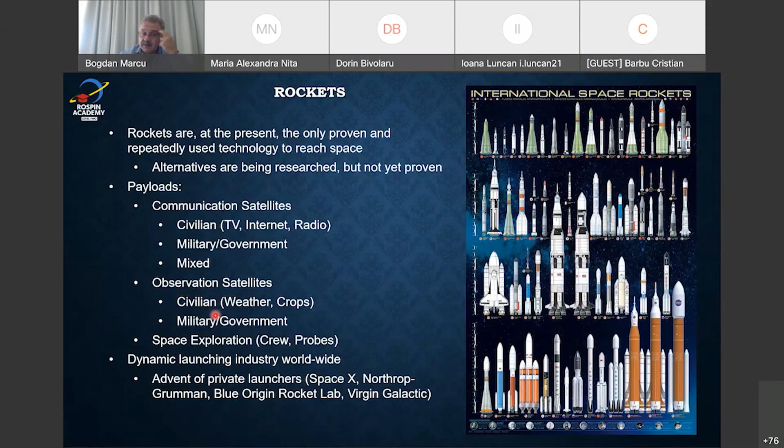There are now very advanced services that sell crop information and weather information, of course, and so forth. Until about 10, 15 years ago, this was an industry based on governmental initiatives and money. No longer, as you're very much aware, there is a new wave, and it was the first wave of private launchers like SpaceX and Orbital Sciences, now Northrop Grumman. And there is a second wave coming. We'll talk a little bit about the many startups that are brewing right now.

The launching industry is very dynamic. The number of satellites, I was lecturing about this topic until about 5 years ago, where the numbers were 1,500 satellites total launched until about 10 years ago, out of which, 5,000 total, out of which only 1,500 were active. The rest of them were just dead without batteries or extinguishing their fuel supply. But in the last 10 years, especially with the advent of this new idea of low Earth orbit constellation of large number of satellites that is being pushed by SpaceX, Starlink, the industry numbers are just exploding.

So currently the launching industry is overall the aerospace business, it's 271 billion with about 5 to 6 billion in launch services only. Just the launch services will expand to about 30 billion by 2030. So lots of rockets coming in to provide all these services. Mind you that there was a false start in the mid 1990s where there was an early anticipation of such big constellations. Iridium is the best example of such a constellation which actually went bankrupt. Technology was not there. So this time, most of the specialists are agreeing that this wave is for real and that only environmental concerns or maybe geostrategic concerns may limit the amount of satellites that we're going to see in the skies.

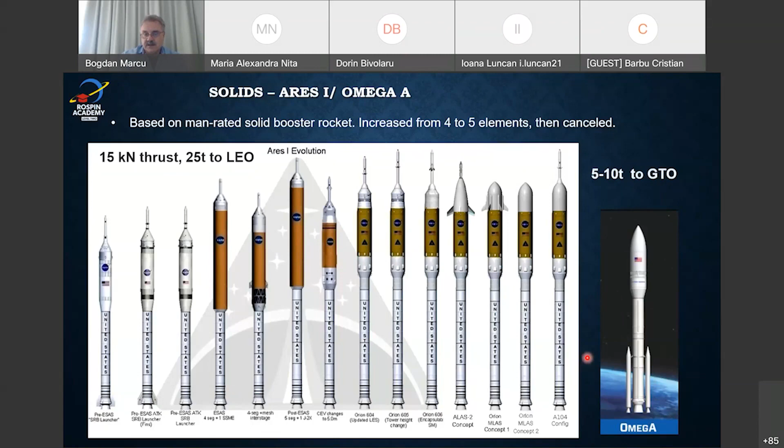On various rockets, historically and at present, of course, the tendency is to increase the payload capacity. For satellites and commercial satellites, 10 to 25 tons to low Earth orbit, which is a metric to compare, is enough. But when it comes to crewed missions, say to the moon or beyond to Mars, you need more capacity, because not only do you have to lift the crew into space, but you have to lift the upper stages that then burn one after another in order to penetrate deep space with a flight.

So the reference remains the 140 tons that was achieved in the 1960s by the Saturn V rockets, powered by 5 F1 engines, each of them with about 1.5 million pounds of thrust. I'll list in a minute the thrust in newtons and SI units. But you can see here that 140 tons is hard to match today.

Even the Space Launch System, which will soon launch in May, is only at 95 tons in this Block 1 configuration, anticipated to increase to about 130 tons in a Block 2 cargo. And these plans are changing as we speak, because various developments are being considered by NASA. The Starship, which will hopefully fly soon from SpaceX, is now going beyond that number with a projected 150 tons when this rocket reaches maturity.

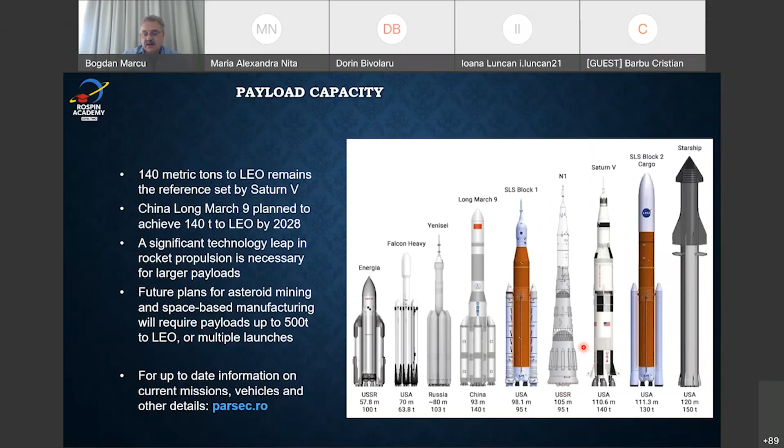And also what the Russians, for instance, didn't have for the Rocket N1, which had, I believe, 30 engines or so, attempting to use multiple engines in a way to generate enough thrust to go to the moon with all these upper stages. The controls available at that era generated instabilities in the operation of so many engines that this very expensive Russian or Soviet rocket was launched twice, and twice it failed in an exceptional way with spectacular explosions.

Besides this liquid propellant rocket engine, the chemical one, there are other principles which were developed and proven, among which is the nuclear thermal. We'll talk about temperatures developed here at the core, which in the chemical engines is obtained by combustion. For the nuclear thermal, the fluid is just flown through core of nuclear fission reactor, so to speak, where the source of the heat is just the radiation itself. Was demonstrated. It's even more performant than the chemical rocket, but there is the perceived public risk of flying nuclear material in space, and for that reason is not yet employed. It's in the planning, however.

And of course, there is the electric propulsion, small thrusters that have a very low thrust but extremely efficient operation, which are used for satellite navigation, station keeping, or even achieving deep space flight. That is, probes that go to Mars, Jupiter, and so forth.

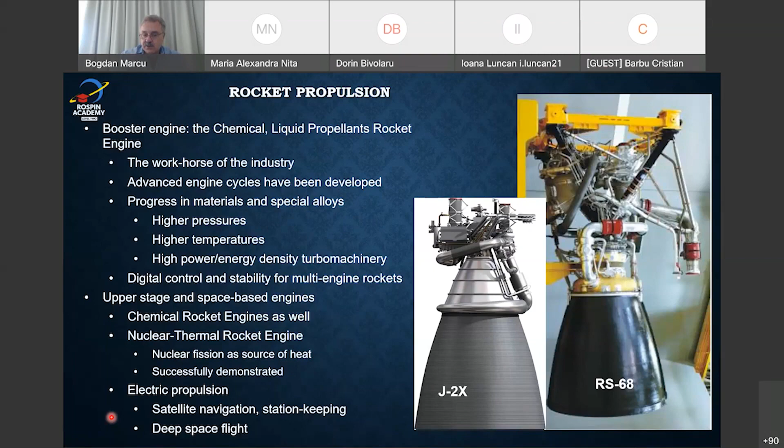So the principle of rocket propulsion is simple. Some of you may study it in school, and for some of you it's new, so I will just assume that for everyone a good intro is welcome. The principle is Newton's third law. Action provokes reaction. We have a recipient of high pressure gas and temperature that we engineered in a way that it expels a mass flow of hot propellant towards my right. And of course, that continuous mass flow of fluid generates reaction of the entire recipient and its extended nozzle towards the left, and we obtain thrust.

There are, of course, various details here. When we look at the thrust equation, we see that the major term here is the product between the amount of mass flow of propellant that we're expelling and the velocity of that propellant. So that's a major component of the thrust. And then there is a play of pressure here at the exit of the rocket nozzle, where depending on which is the gas pressure, PE, versus the atmospheric pressure or ambient, PA, can generate a plus of thrust or a minus of thrust. So the game that's being played here is different for boosters that start on the ground and for upper stages that operate only in space.

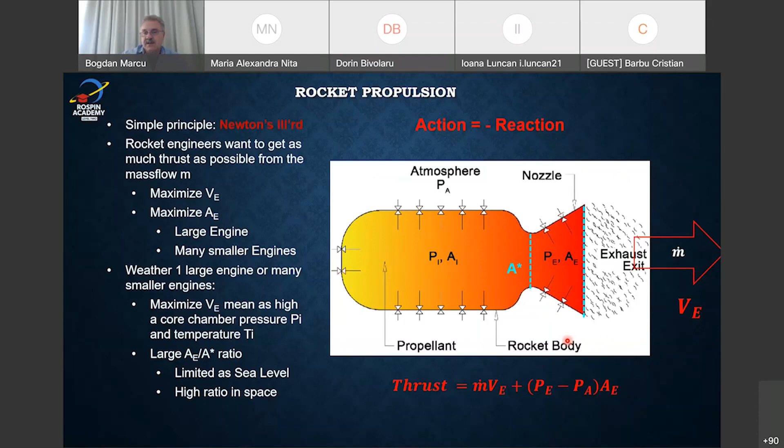While the principle is simple, the idea is that we can start with a nice chamber with enough pressure and temperature in it, but as soon as we expel the gas, this empties, and we're left with no thrust. So for practical purposes, we need to have two tanks, one of fuel, one of oxidizer, and through a mixer and injector, feed them continuously into the rocket engine to maintain this operation and thrust, typically for 150 to 200 seconds during the booster part of the launch, and for the upper stages, a longer thrust of maybe 300 to 400 seconds.

So obviously we put these two propellants into tanks attached to the rocket, and then continuously feed them into the rocket engine. Then more interesting problems appear from the engineering point of view. We want this chamber pressurized as high as possible. The higher the pressure, the more expansion we can get towards the ambient and get more thrust. The first idea is to put these two propellants into tanks that are pressurized really high, and then just feed them through some regulation valves into the rocket and maintain thrust. The problem with this idea is that in order to pressurize these tanks at such a high pressure that we need for the rocket, we need to build really strong walls for these tanks, and obviously then you end up with a very heavy rocket.

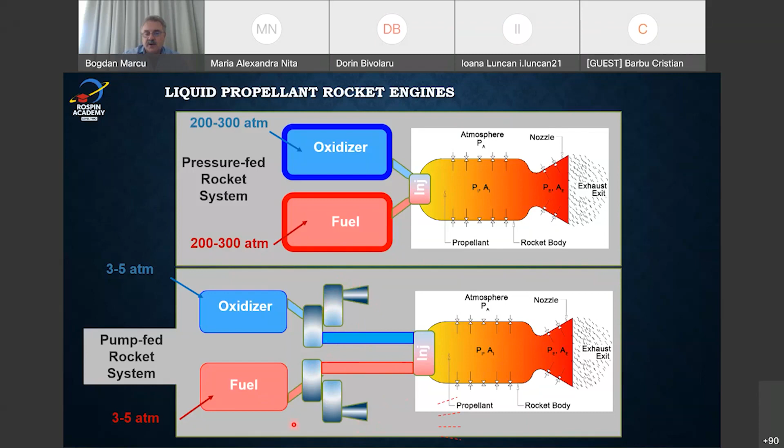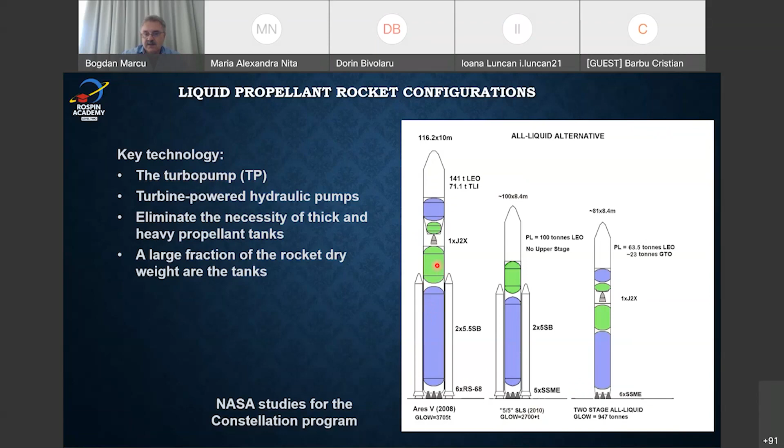The amount of fuel, to go back to this thickness of the tanks, this is a study also during the Constellation program. I borrowed this chart to show you that while the engines are this small compared to the structure of the rocket, most of the rocket is just tanks. These tanks of oxidizer and fuel, this is for the lower first stage, this is for the second stage, are the most part of the body of the rocket. So if you make them thick, then you end up with a very heavy rocket. You need these turbopumps to feed the rocket engine.

You'll see that the powering of these turbopumps is done by turbines. Many times I get the question, why do you need turbines for rockets? We need those turbines in order to power these pumps that feed the rocket engine. And in the very first turbopumps, there is a turbine on one end and the pump on the other end that are installed into the rocket engines. They were developed first in the USA and in Soviet Russia at the time, in the 1930s. Here in the States was Robert Goddard, and I'll show you some pictures.

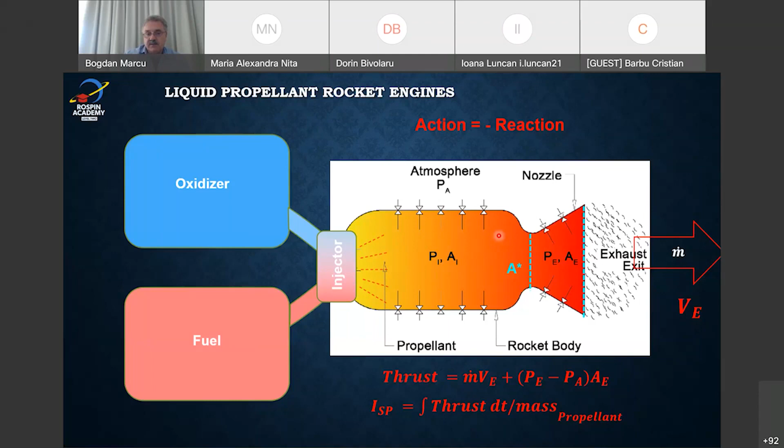And for a chemical rocket engine of very good performance, this ISP has a number of about 400 to 420. That's for hydrogen and LOX propellants. For LOX and RP, this ISP is in the mid to low 300s, and for other combinations is lower. So you would see that this very first engine had a very low ISP for the time. It's a very first turbopump powered rocket, 145 to 150 seconds ISP with this propellant.

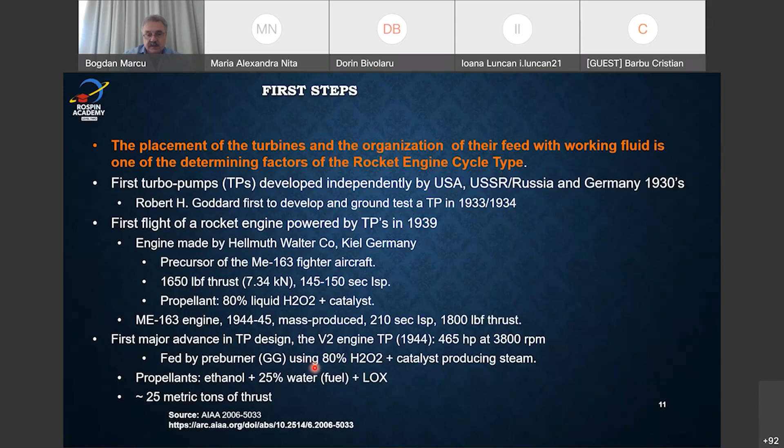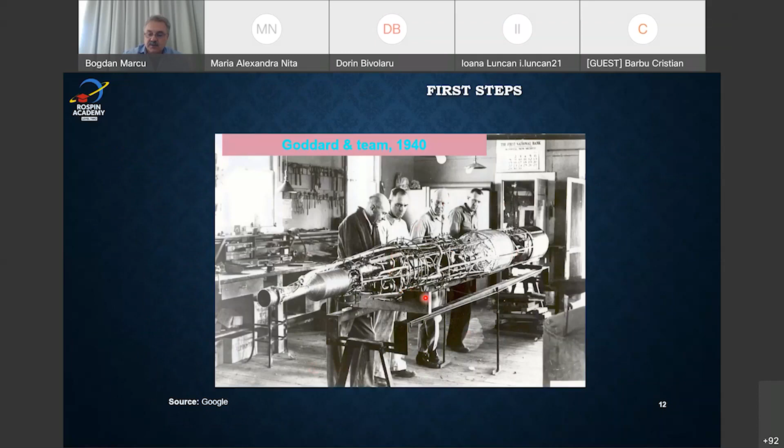The Messerschmitt 163 engine then followed, I'm going to show in a picture in a second. Then the V2 engines developed by von Braun, then developed the pace of the turbopump in the modern engines that we're seeing today. This is Robert Goddard, one of his early rockets, somewhere hidden in a small turbopump. Interesting, here is the Messerschmitt 163 engine. It was powering this very small aircraft.

Germans were desperate in 1944 and 45 to have an airplane that would take off extremely fast and meet the incoming bombers from England and United States coming to massively bomb Germany. And this was the technology response that Germany did. It was powered by a rocket engine that you see here. Somewhere here is the turbopump assembly, a very long extension in the rocket engine. You could see very little expansion. These were not very performant engines.

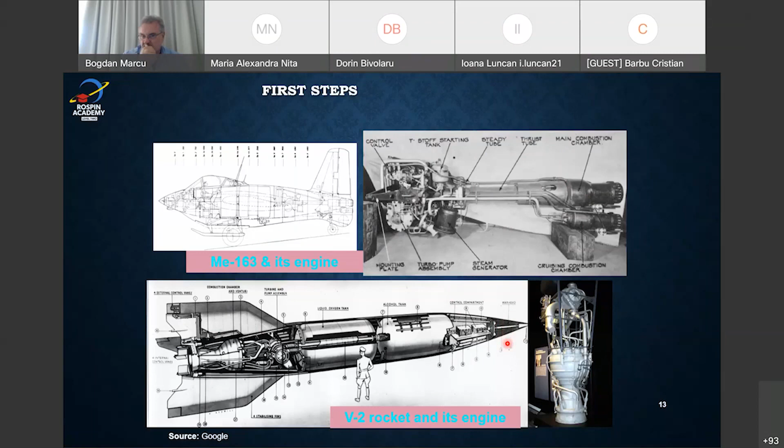The other lesson that we learned is that when you suck the propellant from the tanks at relatively low pressure, the pump experiences cavitation. That is, the fluid develops vapor, and when the vapor collapses in the metal of the blades, it generates destruction, which in a minute or two can destroy your entire engine. And they developed this technology called the inducer, this screw type of part of the pump that sucks the low pressure fuel, increases its pressure a little bit, and that routes it to the main part of the pump.

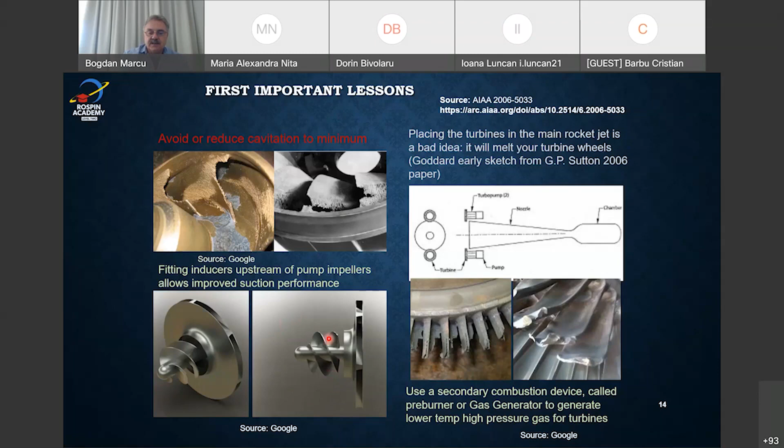So, as I mentioned to you, the placement of these turbines and how you organize the cycle of the rocket engine basically determine the nature of the rocket engine. What Werner von Braun did is to realize that you can't put the turbines here in the nozzle. It's too hot. So then we would organize a small combustion chamber where we would mix propellants in a different mixture ratio. That is, we'll make the gas relatively colder compared to the rocket.

We will put this gas through the turbine. That turbine then will power the two pumps. In this particular case, they are on the same shaft. One turbine powers both pumps, but whatever fluid we're using for the turbine will be then thrown away. While this is a good idea, this fluid is colder, the turbine operates properly. This mass of fluid that we're throwing away then does not participate in the rocket thrust equation, so we're losing it. This cycle is called the GG cycle, from the gas generator cycle.

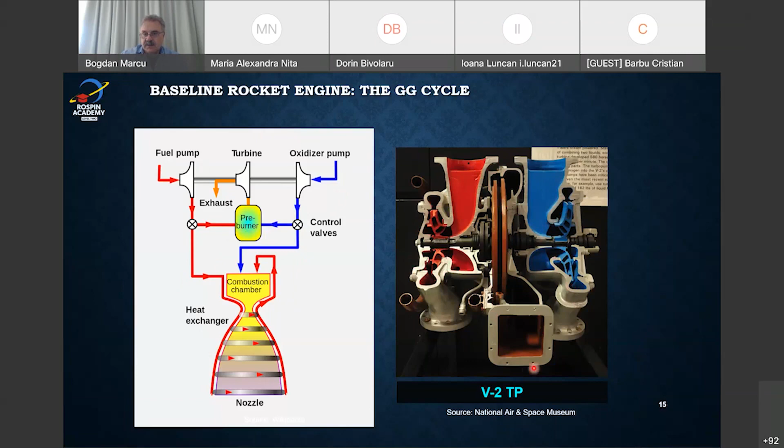It's one of the first ones, and you could see here the V2 turbopump, where the turbine is here in the middle. This is the inlet, and somewhere in the back is the discharge, and this is the fuel pump, and then this is the oxidizer pump that are being powered together. This is the V2 rocket.

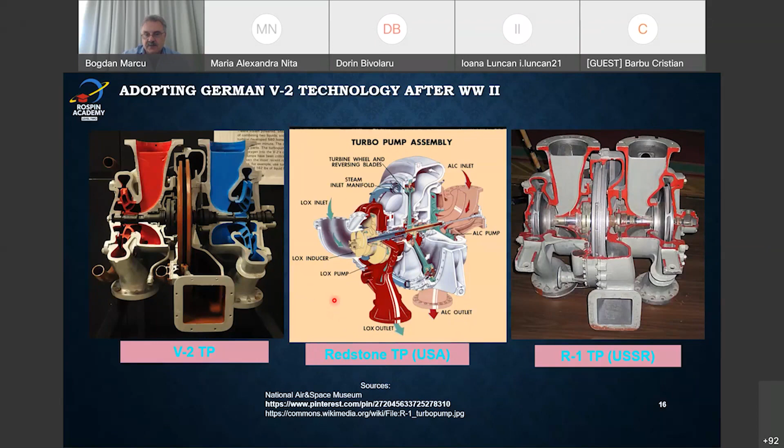Immediately after the war, of course, the winning powers, both Russians and Anglo-Americans, borrowed not only the technology, but the scientists themselves. Werner von Braun and about 100 people in the States, many others in Russia. And you could see that the immediate technologies developed after the war in both Russia, USSR, and in the United States under the name of Redstone are essentially replicas of the original V2 engines. And I had the opportunity to take a look at the Redstone turbopumps right in the backyard of Rocketdyne, where I worked in the late 90s and early 2000s.

So the original cycle that was employed by von Braun and later on even by the F1 engine that powered the Apollo booster had then various other developments. One of them is, for instance, the GG cycle, where the fluid obtained in the gas generator is split into two, and you have two turbines, each of them powering the attached pump.

Why would that be? Well, here we're having a cycle that is using kerosene and liquid oxygen. These two fluids have very similar densities. The pumps are centrifugal pumps that operate by swirling the flow of this particular density centrifugally and obtaining that large pressure that you need for the rocket combustion chamber.

When we're moving then into a cycle where we have on one end hydrogen and on the other end an oxidizer, such as LOX, the density of the hydrogen is about 15 to 16 times lower than that of the oxidizer. So in order to obtain similar pressures, the hydrogen pump has to rotate much faster. So you cannot have the same turbine powering the same shaft because the fuel pump wants to spin faster. So you absolutely have to split the configuration of the engine in two turbo pumps to operate them separately at the necessary speeds. You could do this in parallel, like here.

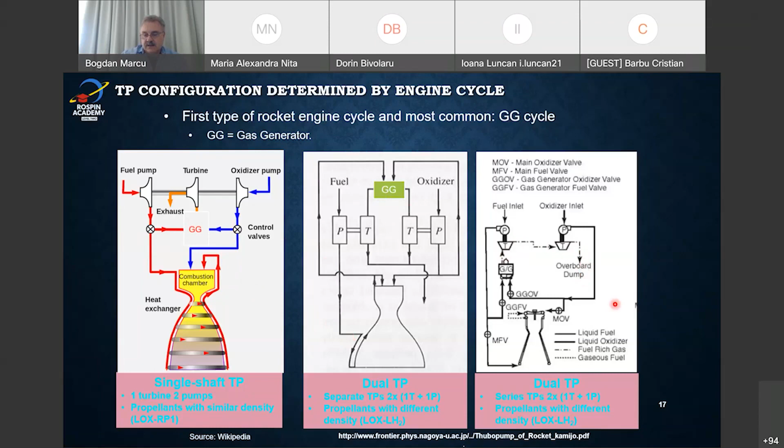This example is the RS-68 engine of the Delta IV rockets. Or you could organize them into a series where you generate the gas, you power first the fuel turbo pump, much faster speed. Whatever energy is left of the fluid after the fuel turbine, you route into the oxidizer turbine that needs lower speed, so relatively lower power, and then you dump it overboard. Okay. In all these cycles, the common element is that whatever you're using in the GG, you're dumping it overboard, and you're losing some of the mass flow that you need for the rocket thrust.

Here's an example of the image of the F1 engine. This is the Apollo era Saturn V engine.

Excuse me. Hello? Yes, sir. Yes, I'm sorry. I'm in a presentation here. We have to talk later. Thank you.

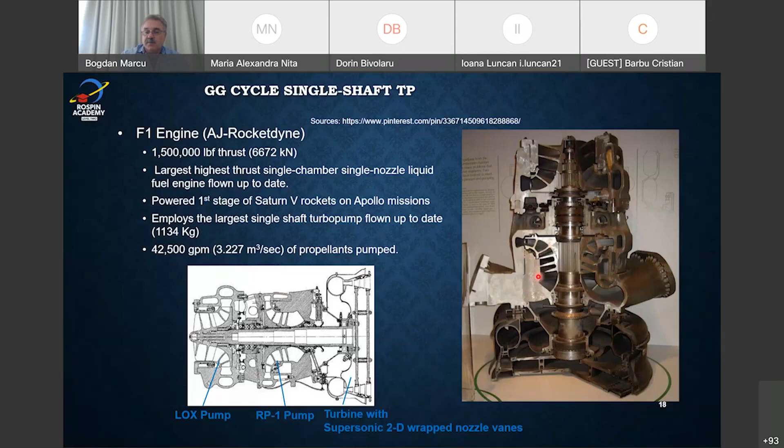Sorry. We're talking about Saturn. This turbo pump is the largest built. Not even the RD-180 has such a large pump. We don't know much details about the engines of the Long March 9 that is being developed now in China. But this is a pump that weighs 1.1 tons. And it's the typical example of a single shaft. You could see it, the turbine at one end. And here is the fuel pump and the oxidizer pump on the opposite end.

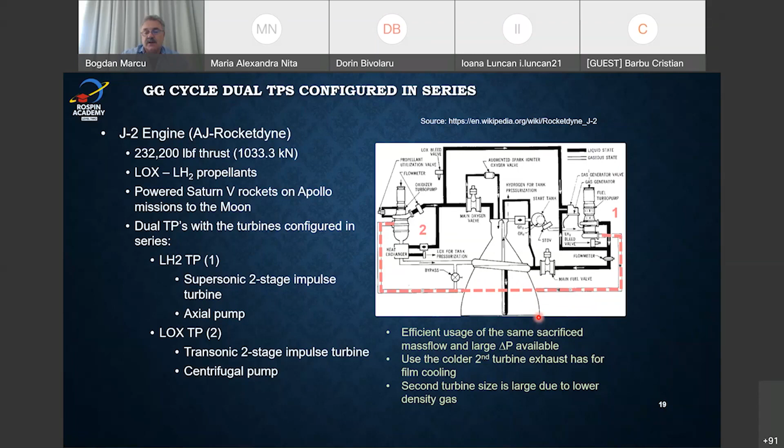And then what's left of this fluid is being injected through this little ring into the extension of the nozzle. J2X is an upper stage nozzle that has a very large extension cone, and it's very hard to cool that cone. So one of these technologies is to take the fluid of the turbines and inject it along the walls. It's a hot fluid, but not as hot as the main fluid of the rocket engine, and you're cooling the rest of the nozzle.

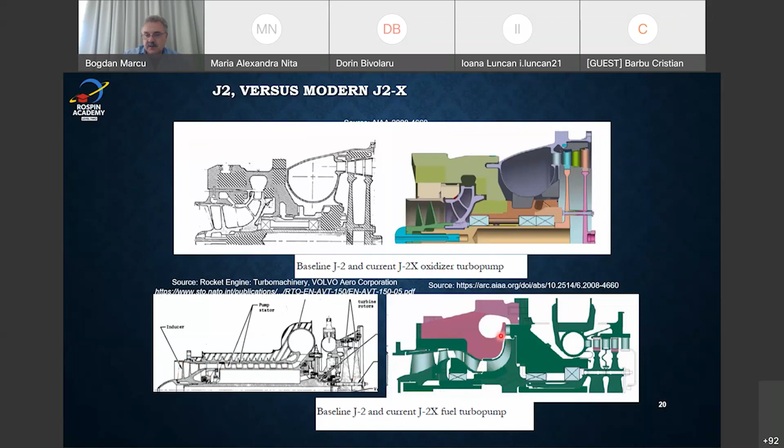This is the old version, and this is heavily censored for publications. The cross section was used for the J2X during the Constellation program. The same here for the fuel pump. The original fuel pump, mind you, developed by the Germans that were still working for NASA at the time, had an axial pump. This inducer that I mentioned to you, plus something that looks like a compressor today, whereas for the latest development, the Rocketdyne engineers have used a centrifugal pump, where the inducer would be coupled with a centrifugal pump and another two-stage turbine.

The late 70s, also having von Braun still working at NASA, brought another more advanced cycle, which was called the staged combustion cycle. The Germans and the NASA scientists were unhappy with the fact that some amount of fuel had to be dumped overboard via the GG cycle and not used in the production of the rocket thrust.

So from this point of view, they introduced the staged combustion cycle, where they would take the fluid from the pump, route it through cooling the entire engine, and then split it into two GG types. We call them pre-burners, where a little bit of oxygen would be introduced, such that they would produce gas with a certain pressure and temperature, but not too hot. And then the resulting fluid would be routed through two turbines, again, fuel, hydrogen, and oxygen, liquid oxygen. And then whatever hot gas remains from the turbine would be just injected into the main rocket and expanded. Here is what we call the power head.

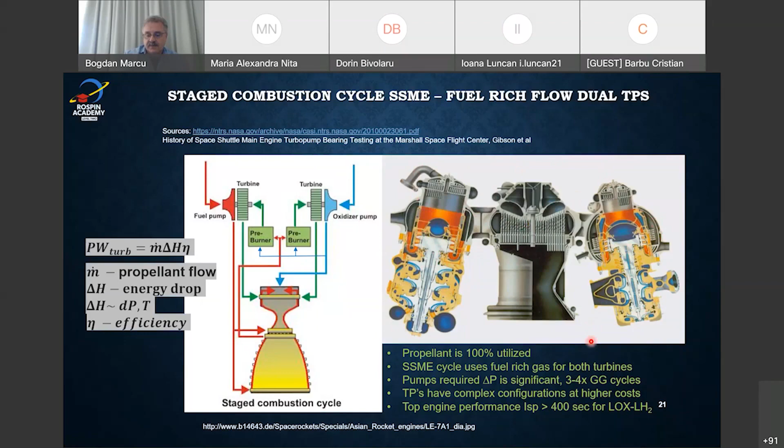The two pre-burners, one here and one here, dump the fluid into the two turbines, then it's being routed through these collectors into the main engine. And each of these turbines is powering the very high pressure pumps. These are more details of these turbo pumps. This new cycle, besides having the advantage of generating much larger pressures for the rocket engine, and therefore a much more performant engine, also had the full utilization of the fluids, so no mass flow was being dumped overboard.

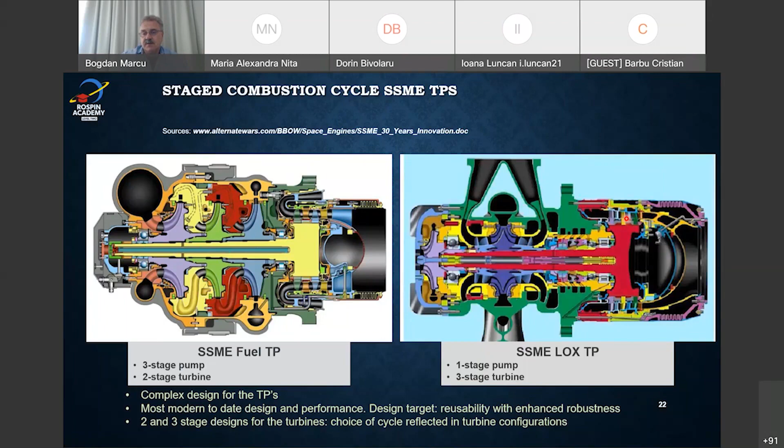The unfortunate part here, the compromise, was the fact that the engineers did not want to flow through these turbines anything other than hydrogen and steam. When you combust in the pre-burner hydrogen and a little bit of oxygen, you get hot steam combined with rich hydrogen. For that reason, these turbines are relatively small and have more than two stages, and they are operating relatively hot in order to get the necessary power to rotate these massive pumps. The same here for the oxidizer turbo pump. You need 3 stages of turbines to route that relatively small amount of fluid and power this massive oxidizer pump.

The Russians, in parallel to this development, had developed another critical technology. They developed materials that were compatible with high pressure oxygen. In the rocket, you have more mass flow of oxygen than mass flow of fuel, be it hydrogen or kerosene. So if you are able to develop a large turbine that can flow high pressure and high temperature oxygen without exploding, if you're rubbing metal against metal or you have another incident like that, like a part breaking a little bit from somewhere in the engine, that happens sometimes, and impacting on the blades, surrounded by high pressure, high temperature oxygen, this entire thing goes kaboom.

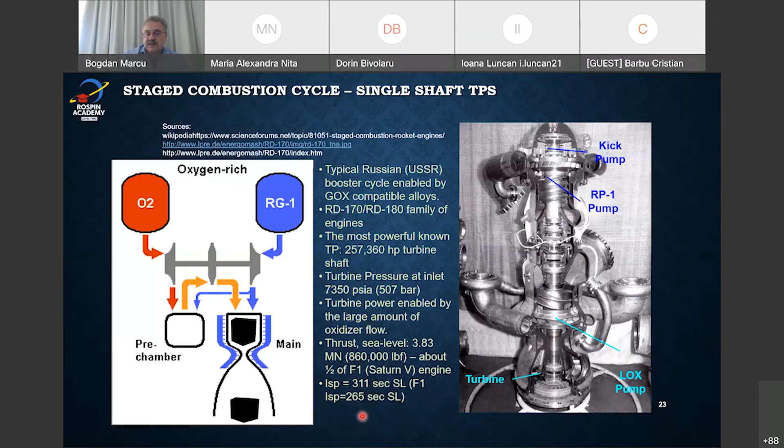The Russians developed this set of alloys, and they developed the oxygen-rich turbo pumps. That is, in the preburner, instead of having a majority hydrogen plus a little oxygen, they would flow the entire mass of oxygen with a little bit of kerosene, so producing a high pressure, high temperature gaseous oxygen with a little bit of steam in it and pushing it through the turbine. And of course, kerosene and oxygen have very similar densities, and they would do this through a single turbo shaft. Here you go. This is a cross section of the RD-180 or RD-170 family of engines. These are extremely performant engines. While they produce about half of the thrust of an F1 engine, they have a better ISP of 311 seconds compared to the 265 of the F1 engine.

Naturally, the fact that that material that was initially developed by the Russians existed has generated finally the most advanced and currently used engine, which is called the full flow engine. Instead of having all hydrogen split into or all oxygen going for the full turbine, this engine takes the fuel, let's say hydrogen, under high pressure. Then first it's cooling off the skirt and the combustion chamber of the main rocket engine, and then goes to a preburner or a GG, which is then fed with a little bit of oxygen. So it produces a flow of majority hydrogen plus a little bit of steam through a single stage turbine.

The oxidizer, the LOX, it goes through a pump, high pressure, goes to another preburner, which is fed with just a little bit of hydrogen, and it produces a mixture of high pressure, high temperature oxygen with a little bit of steam, pass through another single stage turbine and powers the oxidizer pump. This way, you have relatively cold flows with a large mass that powers two turbines, and then everything gets collected into the rocket engine and produces thrust. This is the more elaborate version of the RD-180 engine.

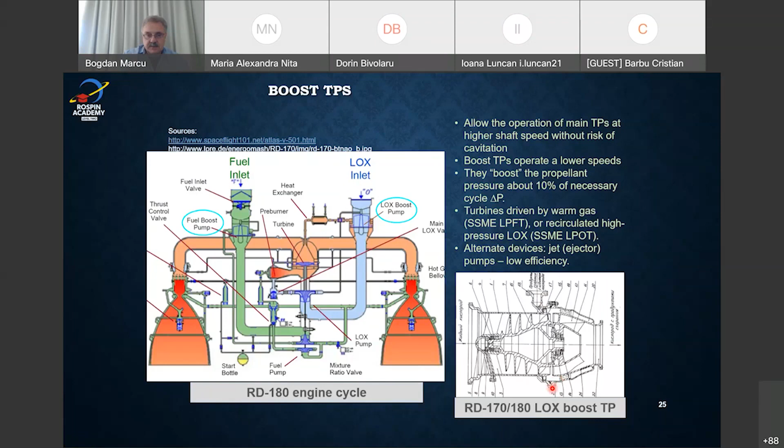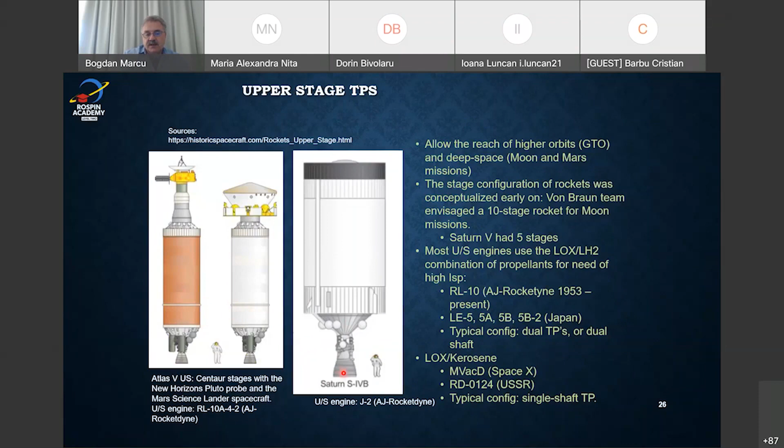the main combustion chamber. This is also another type of cycle where there is no combustion for the turbo pump especially. Instead, the liquid hydrogen that is being discharged from the pumps is being routed as usual to cool the skirt and the main chamber. And then warm, as it is not hot, but warm, it has enough energy to go through the turbine and being then rerouted into the main turbopump, so into the main chamber of the rocket. So therefore, the energy used for the turbine is essentially the heat that's being picked up by cooling the engine. These are called expander cycles.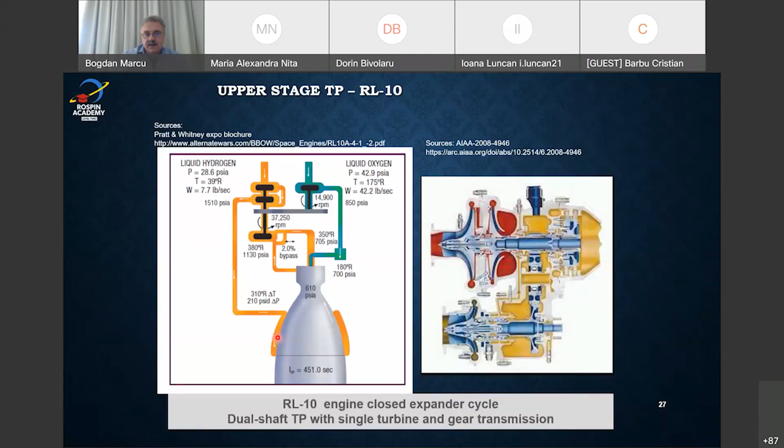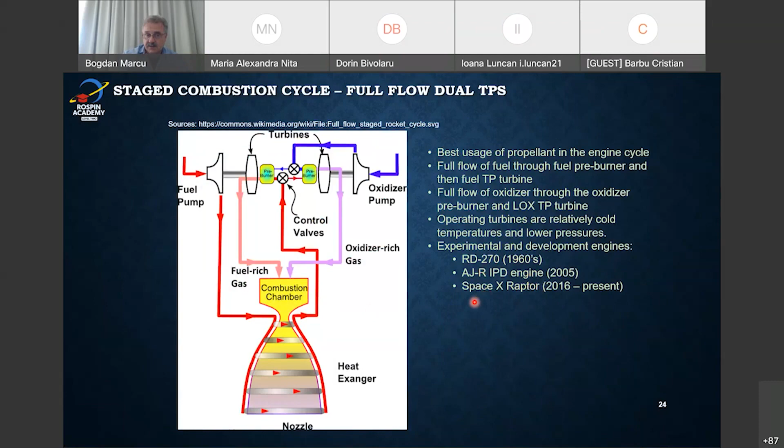So we're getting closer now to a summary. In the future, the way I see it, the stage combustion cycle, this particular one, it's probably the future. Everybody's developing this. These are the SpaceX Raptors. It was demonstrated by Aerojet Rocketdyne in 2005, and there are other companies that are using them. The new smaller startups like ABL or Relativity Space, even the Rocket Lab, they are going back to GG cycles because they are the cheaper, the most proven, and these companies are targeting a relatively small, narrow niche of 500 to 1,000 kilograms of satellites launches, not big ones.

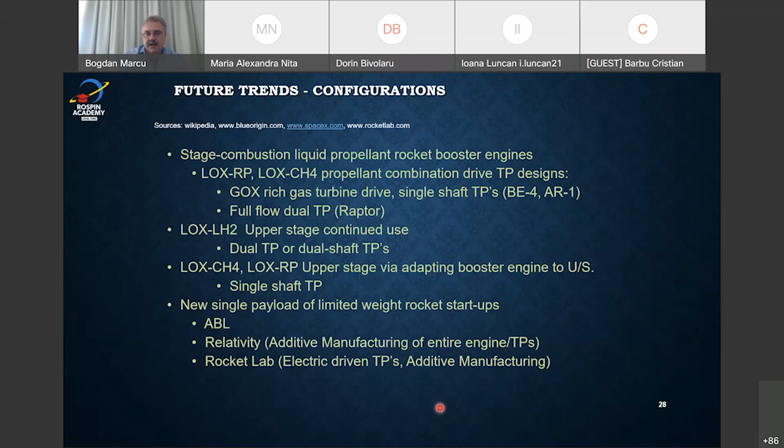And then we will see how the market will select through all these companies. It is clear to me that the financial market of launch industry cannot sustain everybody that's trying now to develop rocket engines. We will see how this will pan out. Technology-wise, NASA is not experimenting with new cycles, but new forms of fabrication. And I'm showing here some examples. NASA has generated a full engine printed, 3D geometry printed.

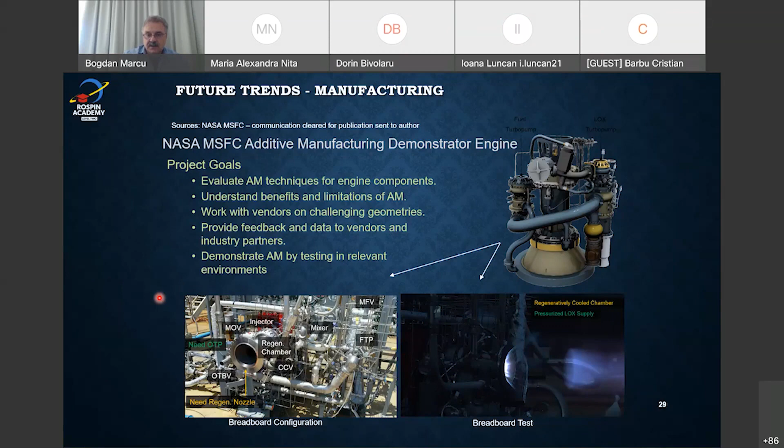They do that by trial and error, working with very many suppliers that print for them. They're not just printing them themselves. And there are a lot of feedbacks and shortcomings to these technologies, but they managed to test 2 turbopumps and 1 engine. And you see here examples of parts being 3D printed and then surface finished by one technology or another.

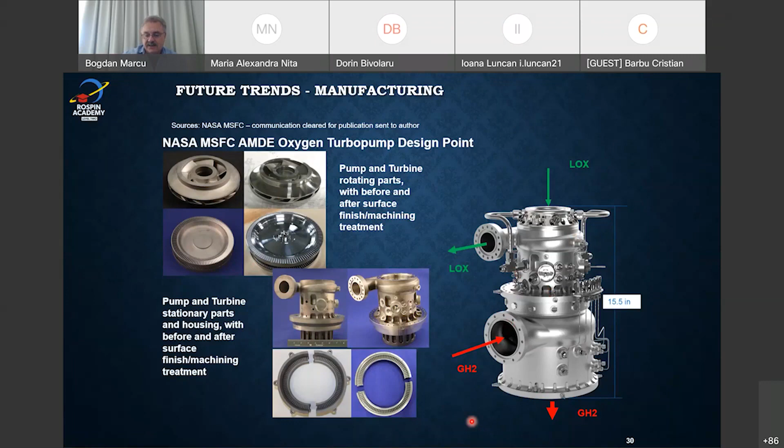This is very important because those of you who may have been involved in 3D printing saw that the surfaces obtained are very rough and they are not really good for fluid flow. Of course, you have housings. So 3D printing is extremely good for housings because otherwise you have to cast them, and casting of complicated housings takes months and months to develop.

So in the future, the liquid propellant chemical rocket will still be the workhorse. All these new companies are developing one version or another of liquid propulsion. There are no new conceptual cycles except fabrication. And depending on what the business models will prove to be efficient in the future, either big geostationary satellites or many LEO satellites of the type of Starlink or Kuiper from Amazon, we'll have to see, and they will decide which of these new companies will stay in business or will have to close.

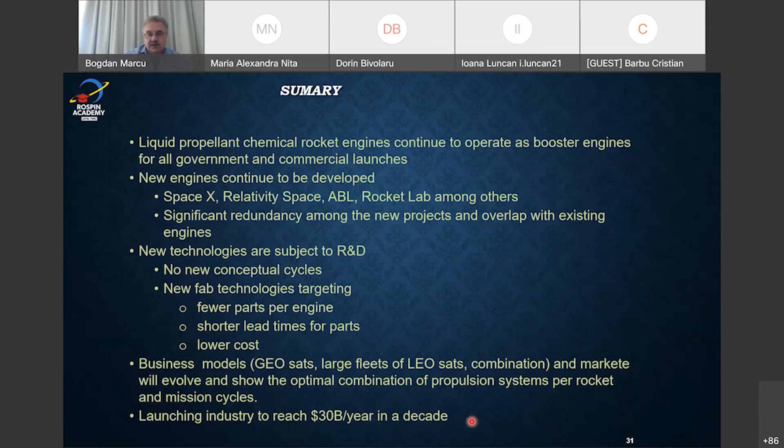Last but not least, I encourage you to examine a book. I happened to be able to write a thriller, which I wanted to write especially to give the reader a feel of the inner workings of the aerospace industry and the personal parts that are involved in such a life.

And also the fact that, as I mentioned to you, if by any chance someone will have a new principle of new rocket engines to push that 140 tons limit into, say, 500 tons, that will be disrupting for the financial market in the rocket business, as well as geopolitical power. So with this, I conclude my presentation, and I'm looking forward to receive your questions. Thank you.

Wow, that was an amazing presentation. For me personally, it kind of took me back to second year propulsion. Like everything in there was very interesting. And now we don't have a lot of time for Q&A, so I hope people get going with questions.